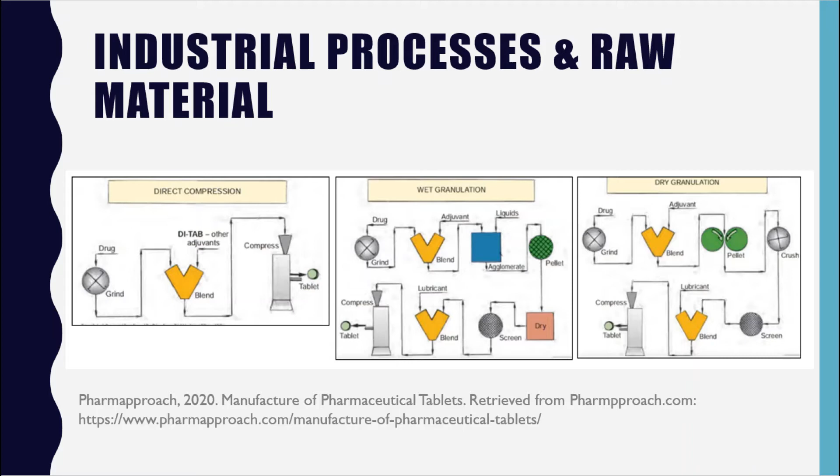The pharmaceutical industry is a $1.3 trillion industry, which is reflected in its immense waste and pollution generation. This has resulted in the world's highest waste generation rate per unit of product, generating anywhere from 25 to over 100 kilograms of waste per kilogram of unit.

This was apparent in 2013, where the US pharmaceutical industry reported over 90 million kilograms of waste to the toxic release inventory. What is especially concerning about this number is that commonly used chemicals such as acetone and ethanol are not included in this figure. So it's safe to assume that the reported figure is a vast underestimate of the true amount of waste produced.

Secondly, most effluents within the pharmaceutical industry contain organic solvents, namely cyclic compounds, alcohols, and ethers, and more, as they are extremely useful in the production process. Proper treatment and disposal of these compounds is necessary as they can pose risk to human health, antimicrobial resistance, and the environment.

Finally, manufacturing waste only constitutes 2% of pharmaceutical waste. 88% of waste enters the environment after patient use and excrement into our waterways.

Three areas of waste minimization opportunities within the pharmaceutical industries firstly involve effective management of inventory storage and categorization, which can limit excess, expired, or redundant materials. Secondly, modification of production and operational procedures. This can be actioned through reducing raw material wastage and spillage, or improving cleaning and maintenance of equipment to increase optimization and longevity and lower maintenance costs.

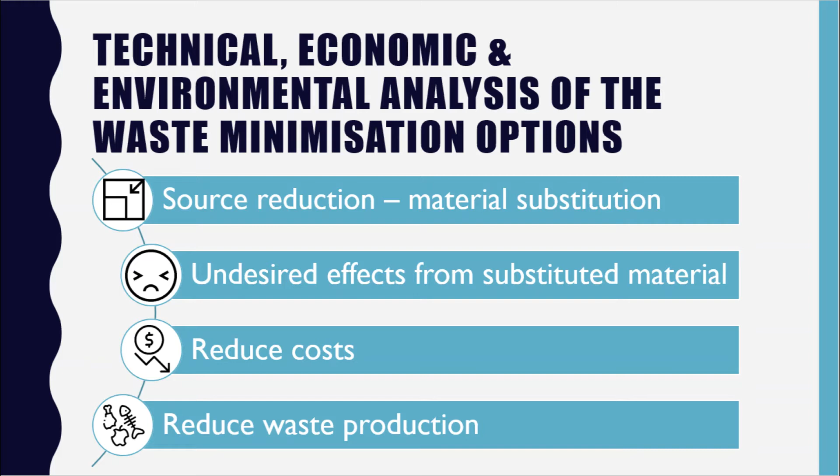To achieve waste minimization in the pharmaceutical industry, source reduction must occur by way of changes in products, raw materials, processes, technologies, or procedural and organizational functions. This can impact products, giving them undesirable effects such as taste, color, and dosage requirement, and thus impacting the customer buying the product. However, it is also proven to help reduce the cost of manufacturing drugs.

If we look at data such as the solvent usage list from the UK pharmaceutical company GSK, it suggests there is a trend towards decreasing common toxic solvents like THF, toluene and DCM, but this does not mean that they are not widely used. This ties into the product/process yield, which determines the product to waste ratio. Process efficiency can be improved by increasing automation to reduce human error, which allows for stricter control mechanisms to be placed on machine operating.

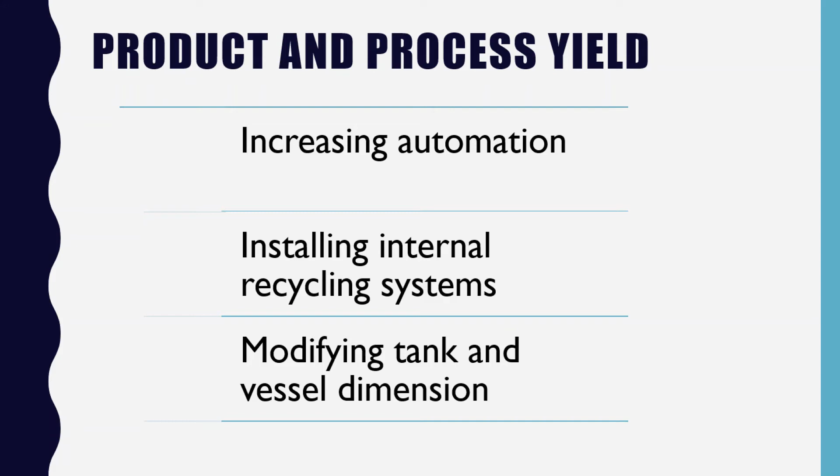Installing internal recycling systems for cooling waters and solvents, and modifying tank and vessel dimensions can also greatly improve operating efficiency. Another major issue arises in finding suitable replacements for dipolar aprotic solvents, that is, solvents with strong permanent dipoles and low reactivity, as they are hard to find.

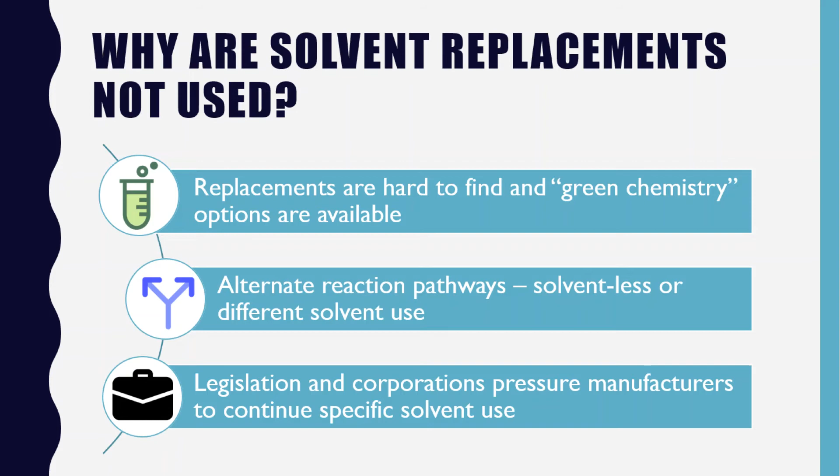Green chemistry is being rapidly adopted by process chemists and engineers due to it being the best course of action for the environment, in addition to being a new economically viable alternative. Most suitable replacements for dipolar aprotic solvents or alternative synthetic strategies that avoid their use are often not used due to legislative and corporative pressures.

These solvents are most often used in aqueous workups and produce mixed aqueous and organic waste, which can be difficult and expensive to separate. The wastewater that results from this requires extensive treatment, has an extremely high chemical and biological oxygen demand, and requires incineration, which produces pollutants.

Due to the ridiculously high amount of solvent used per kilogram of API, around 80 to 90%, even small reductions or improved efficiency in terms of amount of solvent used have large effects. For example, a 0.25 kilo reduction in THF equates to about a 4 kilo reduction in CO2 equivalent greenhouse gas emissions. This is before accounting for the disposal or recovery related emissions.

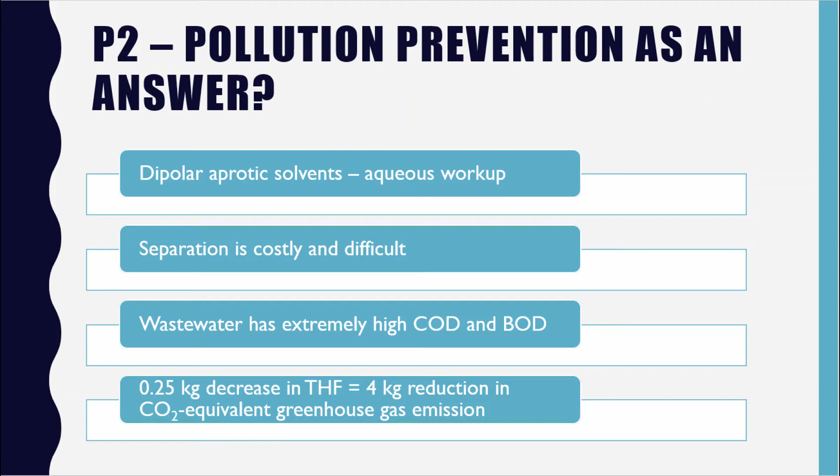In conjunction with reduced organic solvent load, membrane processes are especially effective in treating pharmaceutical wastewater and can be adjusted based on particle size of the contaminant. While membrane processes are extremely energy efficient compared to more commonplace separation and treatment techniques such as incineration, the issue that arises is that startup costs can be expensive and processes generally lack appropriate design to account for factors like pressure drop, concentration, or temperature.

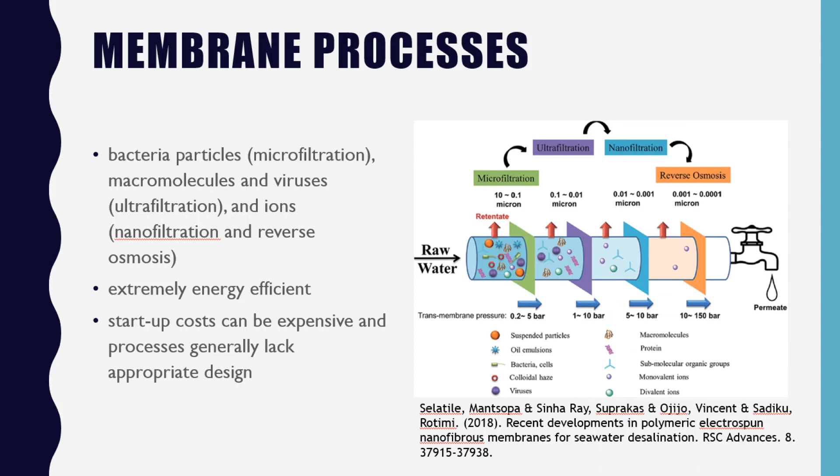The improved method resulted in reduction of organic solvent use, reducing 5,200 metric tons of solvent waste annually. This does not account for the reduced emissions that would be used for treatment. Highly concentrated waste streams were treated via distillation before being sold to a third party as generic solvent. There are a variety of alternative waste treatment methodologies for the pharmaceutical industry.

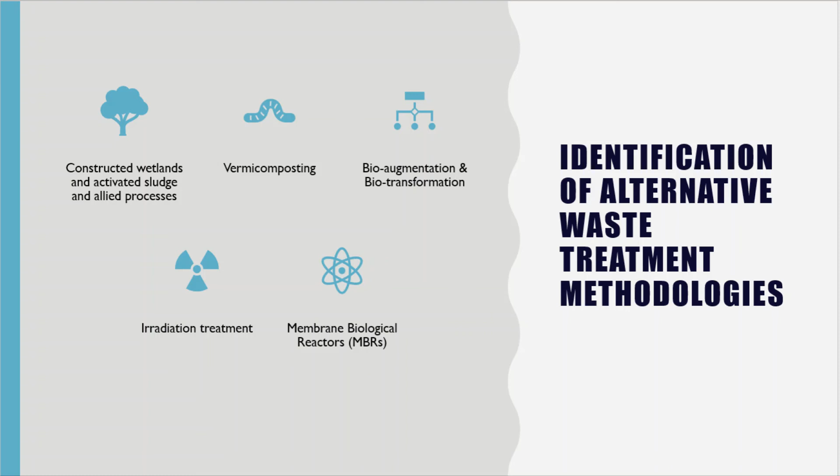Biological treatments use microorganisms to break down waste mixtures into sludge, using methods such as constructed wetlands, vermicomposting, aerobic and anaerobic digestion, bioaugmentation, biotransformation, membrane separation, and irradiation treatment. These biological treatments require strict environmental control and monitoring, which include pH levels, temperature, rotational velocity, oxygen levels, and substrate concentration. Otherwise, there is a high risk of toxicity occurring.

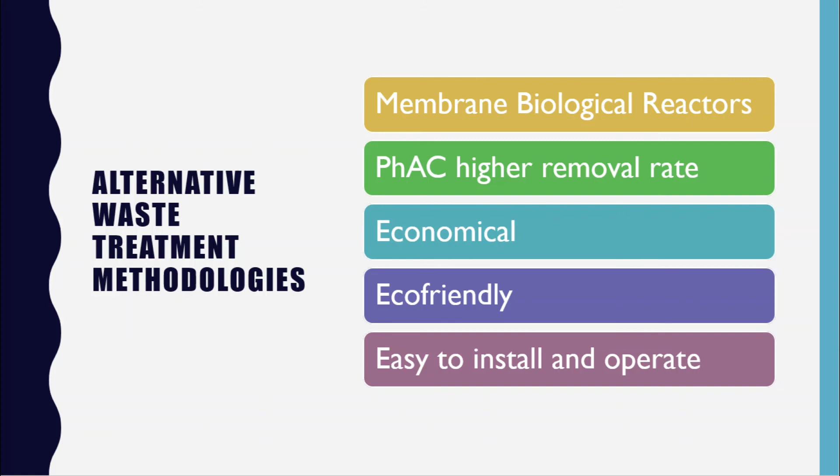The most appropriate methodology for pharmaceutical waste treatment is membrane biological reactors. This is because they are effective at removal rate of pharmaceutically active compounds in wastewater compared to many other options. They are also eco-friendly, economical considering the initial installation costs, and easy to install and operate. The design of membrane biological reactors needs to consider the following: plant footprint, effluent quality, process stability, energy consumption, as well as key design features regarding wastewater composition, volume, and temperature.

There are 5 essential design characteristics that need to be met: pre-treatment, membrane location, membrane configuration, and systems operation, as well as downstream treatment. For membrane configuration, material type: ceramic is the best but is the most expensive. There needs to be consideration for the mixture of hydrophobic and hydrophilic materials. The surface charge needs to be negative, and the surface roughness and pore size need to be considered.

For pore size, porous, sieving, straining, and size exclusion regarding micro, ultra, and nanofiltration are built. There's also non-porous, solubility, and diffusivity options. For systems operations, it can be pumping or pressurized vacuum or air scour techniques.

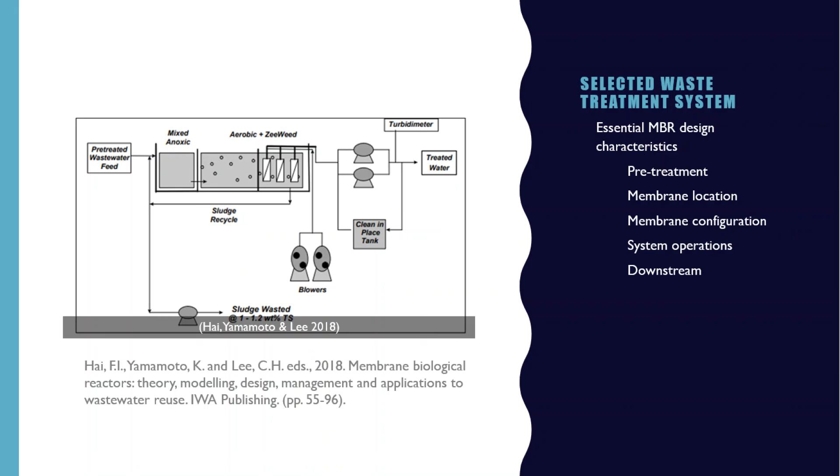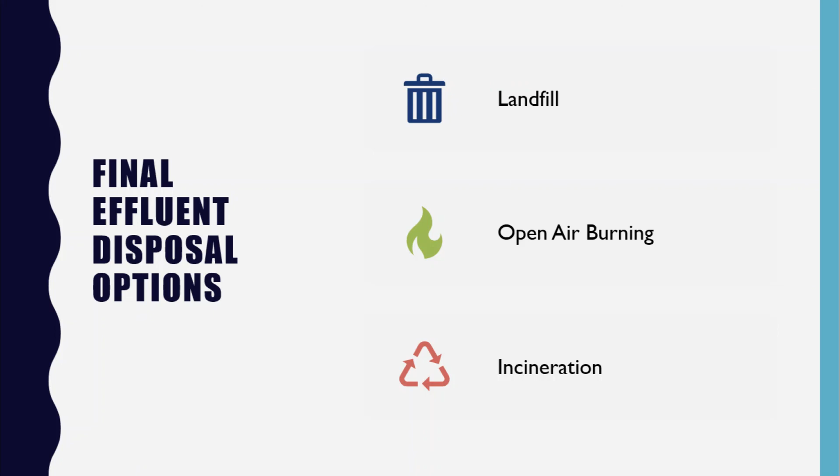The final effluent disposal options for pharmaceutical industries include landfill, open burning, and incineration. Landfill is harmful if any leaching escapes the system, and open burning and incineration produce a lot of air pollution but also have a chance for spreading pathogens. The best future option is zero discharge.

This report recommends a few options to be taken for further studies in the future. We need to know the effects of long-term life cycle for unaccounted pharmaceutically active compounds and excipients that enter aquatic and terrestrial environments, as well as improve the toxicology testing methods. We also need to encourage policy reform to incentivize green chemistry and invest in better final effluent options.